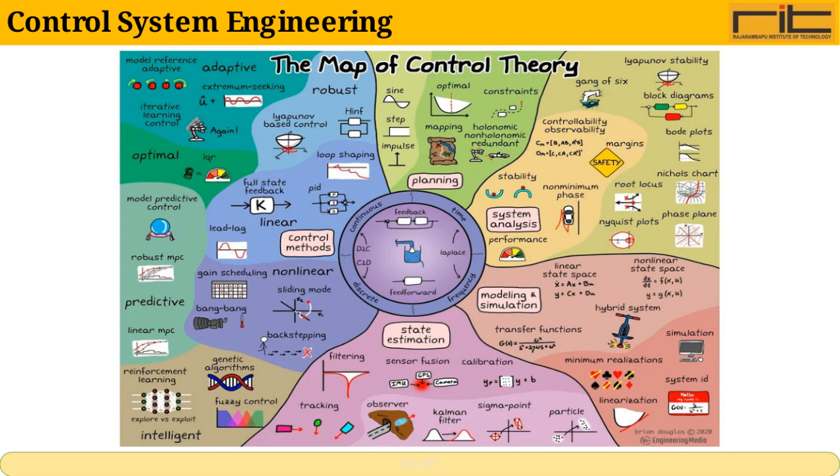After completing this session, students will be able to represent physical systems through mathematical models. This is a crucial skill as it allows us to move from real-world scenarios to a form we can analyze and work with mathematically. They will also learn to calculate time domain specifications for second-order systems. Understanding these specifications is essential because it helps us predict how a system responds over time, which is key in control engineering.

Additionally, students will develop the ability to analyze different systems using both time domain and frequency domain tools and techniques. This dual approach provides a comprehensive understanding of system behavior from different perspectives. We'll also cover the comparison of various controllers and compensators used in control systems, enabling students to choose the most suitable methods to achieve desired performance. Finally, students will apply state space techniques to analyze and understand MIMO, or multiple input multiple output, systems. This advanced approach is vital for managing complex systems with multiple variables. Overall, these outcomes equip students with a solid foundation in feedback control systems.

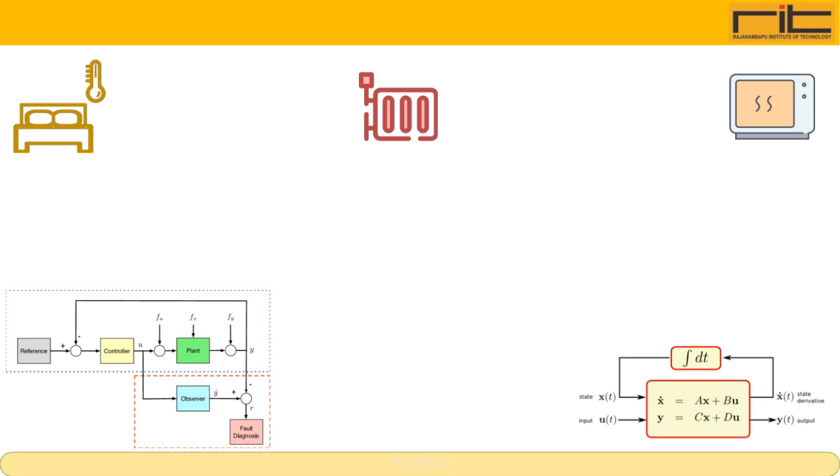Now, let's focus on Unit 2, which covers control system representation. This section is fundamental because it lays the groundwork for understanding how control systems are modeled and analyzed. We'll explore different ways to represent control systems, including mathematical models and graphical tools. This will help us to better predict how a system behaves under various conditions and design effective controllers. Understanding these representations is crucial for working with more complex systems later on.

By the end of this chapter, you will be able to clearly define and interpret what a transfer function means in the context of a linear time invariant system. You'll also learn how to identify the poles and zeros of a system, which are crucial for understanding its behavior. We will explore how to develop mathematical models for different types of systems, including electrical, mechanical, thermal, and hydraulic ones, using standard physical laws. Additionally, you'll gain the skills to construct and simplify block diagram representations of control systems, utilizing block diagram algebra for easier analysis.

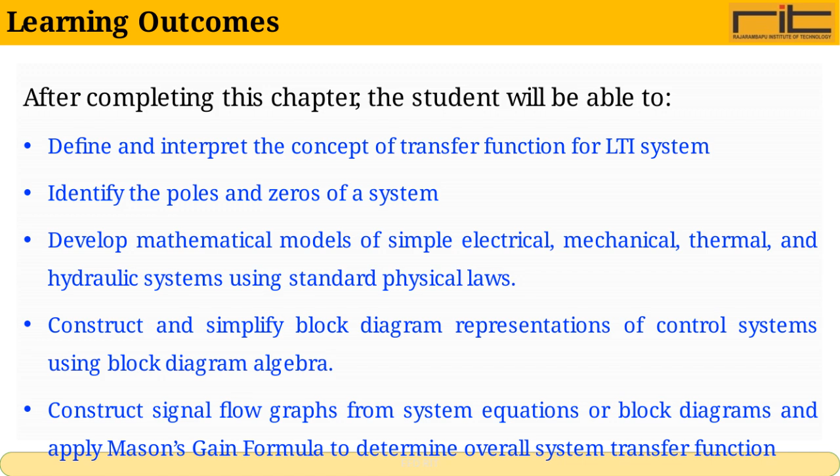We'll also cover how to create signal flow graphs from system equations or block diagrams, and apply Mason's gain formula to find the overall transfer function. Finally, you'll analyze how the locations of poles and zeros influence system behavior, especially regarding stability and transient response, in a qualitative way. These outcomes will give you a solid foundation to approach control system analysis confidently.

Here, we're focusing on some fundamental concepts that form the backbone of system analysis. First, we'll look at the transfer function, which is a crucial tool for describing the input-output relationship of a system in mathematical terms. Alongside this, we'll explore poles and zeros, which help us understand system behavior, stability, and response characteristics. Next, we'll delve into the mathematical representation of various simple systems, whether mechanical, electrical, thermal, or hydraulic. This will give us the ability to model real-world systems in a unified framework.

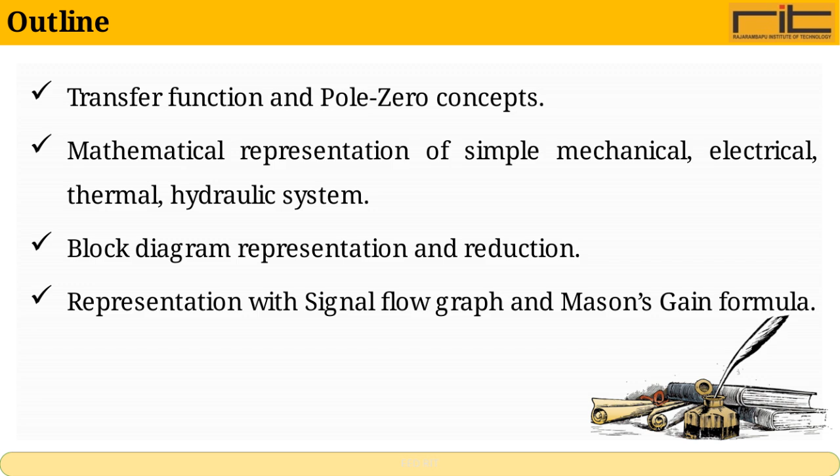Following that, we'll examine block diagram representation, which is essential for visually mapping out complex systems. We'll not only learn how to construct these diagrams but also how to simplify or reduce them, making analysis more manageable. Lastly, we'll cover signal flow graphs and Mason's gain formula, powerful techniques for analyzing system behavior and determining the overall transfer function in a more systematic and often simpler way. These concepts together will equip us with a solid foundation for deeper system analysis.

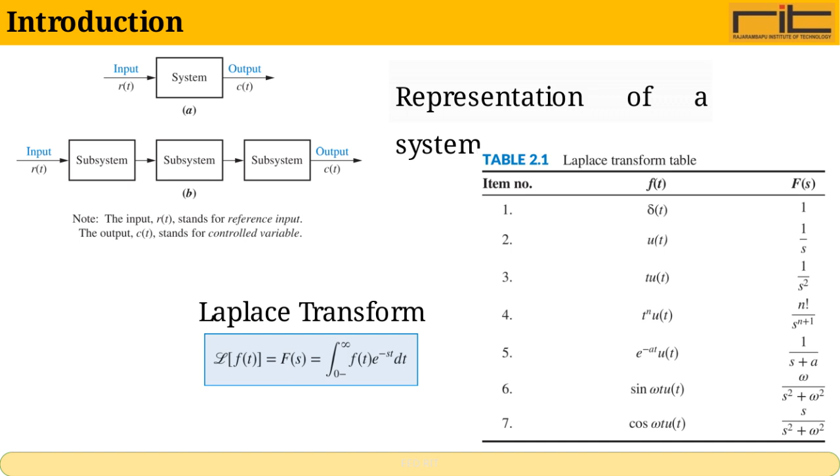Here we have the introduction to the Laplace transform, which is a powerful mathematical tool used to represent systems, especially in engineering and control theory. Essentially, the Laplace transform helps us convert complex differential equations, which describe system behavior in the time domain, into simpler algebraic equations in the frequency domain. This transformation makes analyzing and designing systems much more manageable. Understanding this concept is fundamental because it lays the foundation for how we model and control dynamic systems effectively.

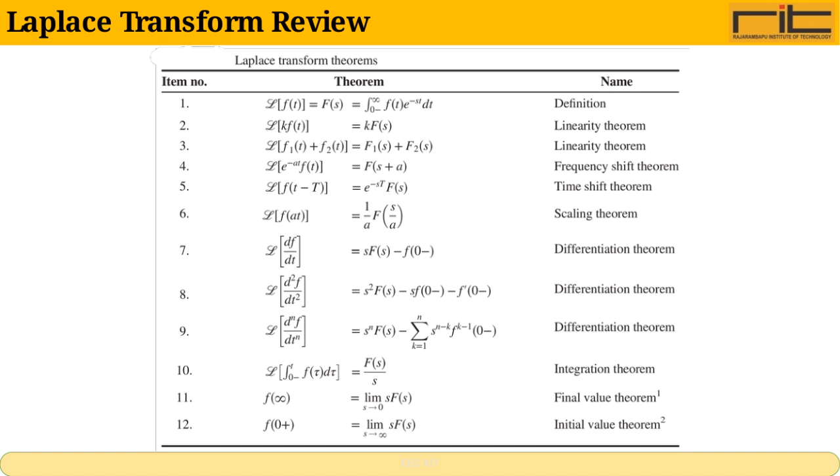Today, we're taking a closer look at the Laplace transform. This is a powerful mathematical tool that simplifies the process of analyzing complex systems, especially in engineering and physics. By transforming functions from the time domain into the S-domain, it makes solving differential equations much more manageable. Understanding the Laplace transform is essential because it allows us to work with algebraic equations instead of differential ones, making it easier to design and analyze systems. Throughout this review, we'll cover its definition, key properties, and some important applications. This foundation will really help when we move on to more advanced topics later on.

Here, we're focusing on the concept of the transfer function. Essentially, the transfer function is a mathematical representation that defines the relationship between the input and output of a system. It provides a way to analyze how signals are transformed as they pass through the system, often expressed in terms of frequency response. Understanding this function is crucial because it allows us to predict system behavior, design effective filters, and ensure stability in control systems. As we move forward, keep in mind that the transfer function forms the foundation for many advanced topics in system analysis and design.

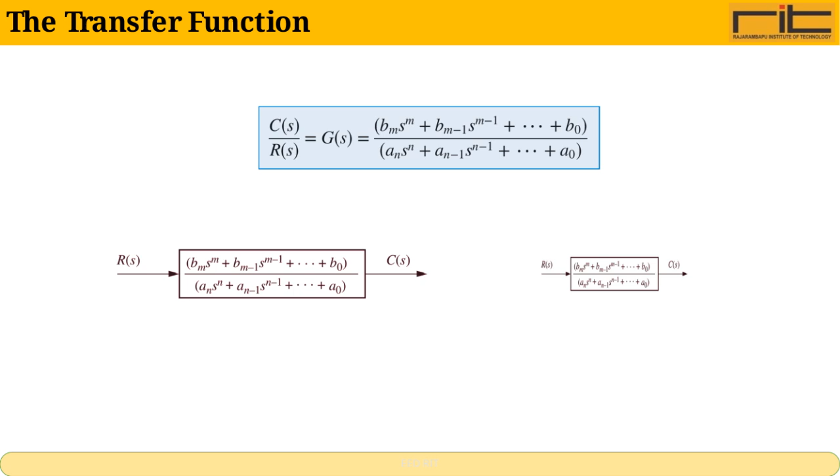Here, we're focusing on understanding how to find the transfer function. The transfer function is a fundamental concept in control systems and signal processing, as it describes the relationship between the input and the output of a system in the Laplace domain. Essentially, it helps us understand how the system responds to different inputs. In this example, we'll work through the process of calculating the transfer function step by step, breaking down the components involved. This will give us a clear picture of how to represent the system mathematically and analyze its behavior. The transfer function is typically expressed as a ratio of output to input, making it a powerful tool for designing and assessing system performance.

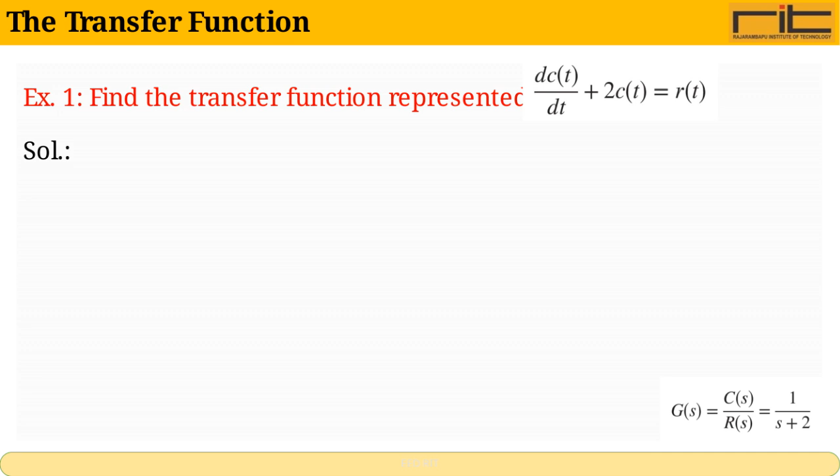Now, we will build on the previous example where we found a certain result, and use it to determine the system's response, C of t, to a specific input, particularly the unit step function, R of t equals U of t. It's important to note that we are assuming zero initial conditions here, which simplifies our calculations. This process essentially involves applying the transfer function to the input to find the output. By doing this, we can see how the system behaves over time when subjected to a sudden change like the unit step. Understanding this response is crucial for analyzing system stability and performance in practical applications.

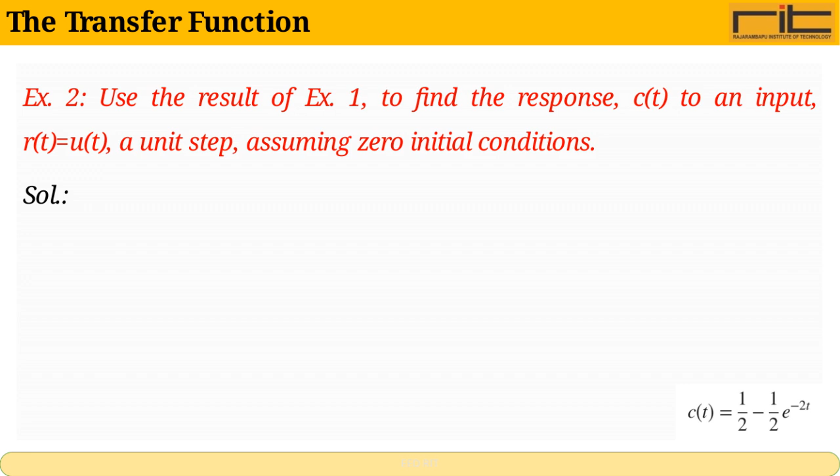Let's take a closer look at the pole zero concept, which is fundamental in understanding the behavior of many systems, especially in signal processing and control theory. The pole zero plot is a graphical representation that shows the locations of poles and zeros of a system on the complex plane. Poles are points where the system's transfer function goes to infinity, and they heavily influence system stability and response. Zeros, on the other hand, are points where the transfer function becomes zero, and they affect the frequency characteristics of the system.

By analyzing the distribution of poles and zeros, we can predict how the system will behave in terms of stability, resonance, and filtering properties. This plot serves as a valuable tool in designing and analyzing systems to achieve desired performance.

Here we focus on the pole zero concept, which is fundamental in understanding system responses. The key idea is that the form of a system's homogeneous response is directly determined by the locations of its poles on the pole zero plot.

Poles are specific points in the complex plane that represent the system's natural frequencies and damping characteristics. When we look at this plot, each pole influences how the system behaves over time, shaping the overall response.

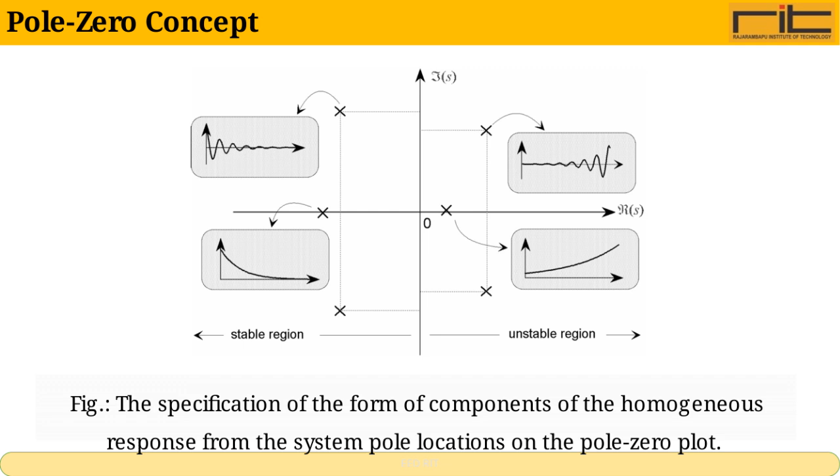This concept is crucial for analyzing stability and dynamic performance, as it links the system's mathematical model to its physical behavior. By studying the pole zero configuration, we can predict how the system will react to different inputs and design it for desired characteristics.

Let's take a closer look at electrical network transfer functions. The equivalent circuits we're dealing with are made up of three key passive linear components: resistors, capacitors, and inductors. Each of these components has distinct electrical properties and relationships between voltage and current.

For resistors, the voltage across the component is directly proportional to the current flowing through it, following Ohm's law. Capacitors relate voltage to the charge stored, and their current depends on the rate of change of voltage. Inductors link voltage to the rate of change of current through them.

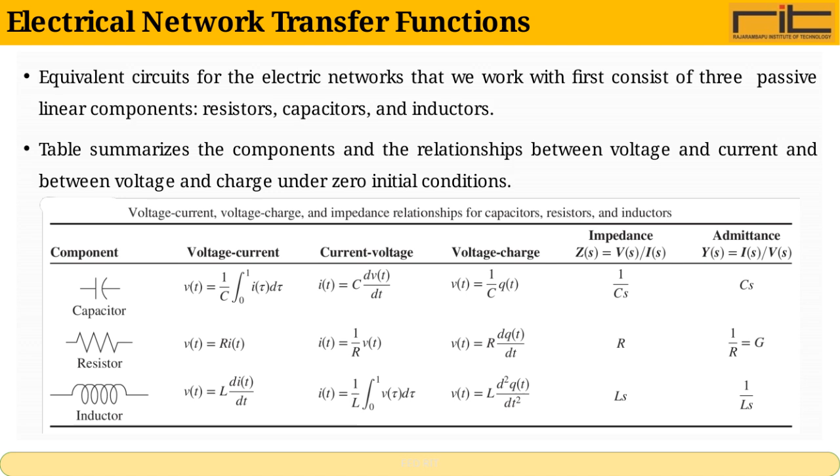Under zero initial conditions, these relationships allow us to model the behavior of complex circuits by analyzing these basic building blocks. This table neatly summarizes these relationships, making it easier to understand how voltage, current, and charge interact within each component. Understanding these fundamentals is crucial for analyzing and designing efficient electrical networks.

Here we're focusing on an example that helps us understand how to derive the transfer function of an electrical network. Specifically, we want to find the transfer function that relates the capacitor voltage, denoted as Vc(s), to the input voltage, V(s).

This means we're looking at how the voltage across the capacitor changes in response to the overall input voltage applied to the circuit. Understanding this relationship is crucial because it tells us a lot about the circuit's behavior in the frequency domain, which is essential for analyzing and designing electrical systems effectively.

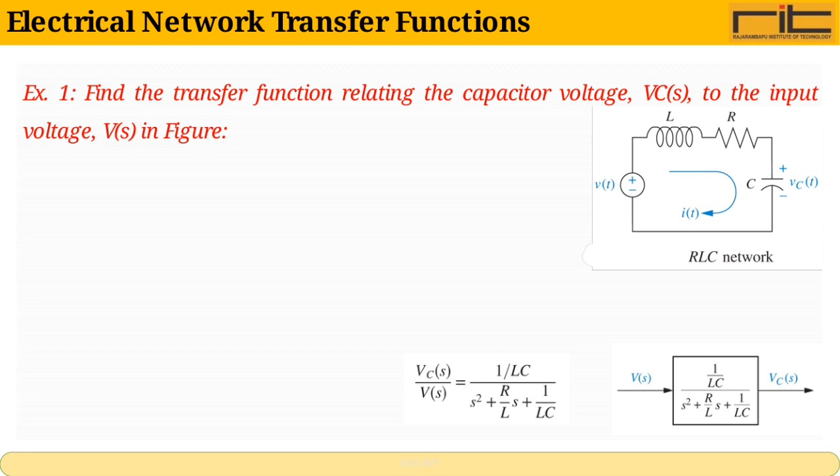As we proceed, pay close attention to how the voltages and impedances interact, as this will guide us in setting up the right equations to find the transfer function.

On this slide, we are focusing on electrical network transfer functions, which are essential for analyzing how different components affect signals within a circuit. The key elements here are the resistor, the inductor, and the capacitor. Each of these components has its own transfer function, which describes how they respond to electrical inputs, especially as frequencies change.

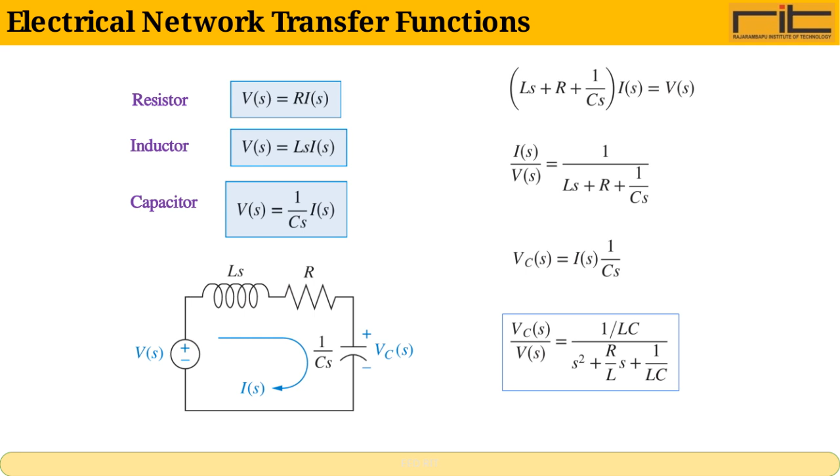For example, resistors have a straightforward transfer function as they oppose current consistently, regardless of frequency. Inductors, on the other hand, oppose changes in current more at higher frequencies, and capacitors do the opposite, allowing more current at higher frequencies. Understanding these transfer functions is crucial for designing and analyzing circuits for filtering, signal processing, and many other applications.

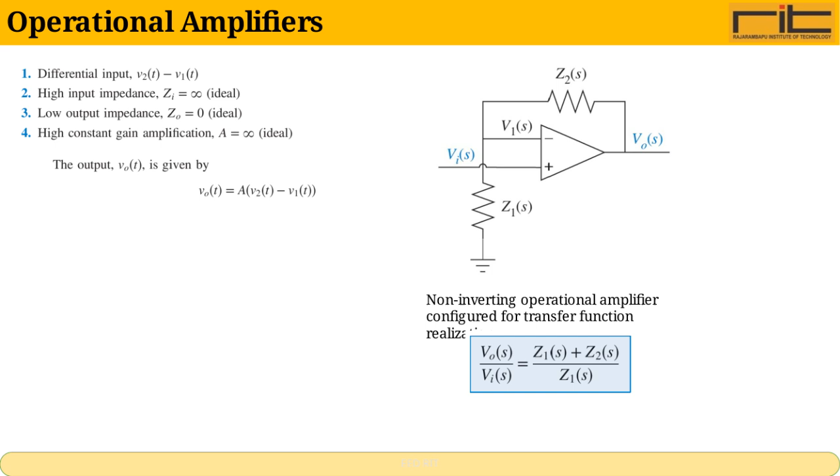This setup is widely used because it offers high input impedance and low output impedance, which is excellent for signal amplification without loading the source. Essentially, it's a reliable and efficient way to achieve precise signal amplification, making it fundamental in many electronic circuits.

Here we have an important topic in operational amplifier circuits, the inverting and non-inverting configurations. These two fundamental setups define how the input signal is processed and amplified by the op-amp. In the inverting configuration, the input signal is applied to the inverting input terminal, which results in the output being inverted in phase, meaning it flips upside down relative to the input. This allows for precise gain control using feedback resistors.

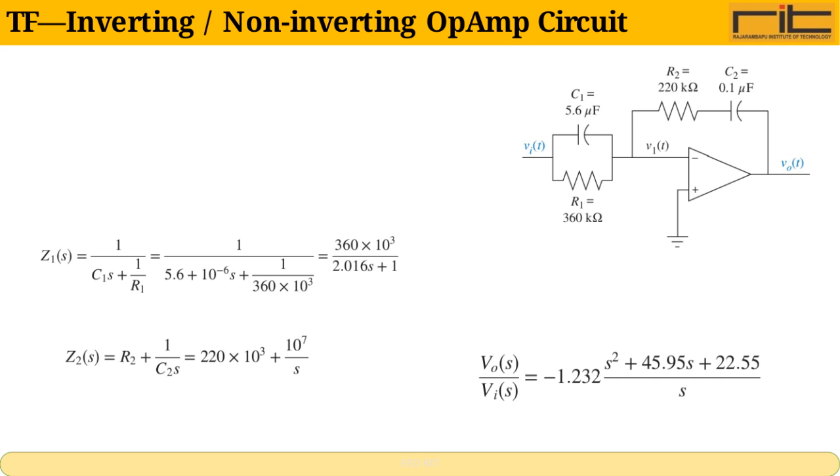Meanwhile, the non-inverting configuration applies the input signal to the non-inverting terminal, so the output remains in phase with the input. Both configurations are widely used in different applications depending on whether we want the output to be a mirror image or to maintain the original signal direction. Understanding these configurations is essential for designing circuits with the desired amplification characteristics and signal behavior.

In mechanical systems, much like electrical networks, we work with three fundamental passive components. Two of these, the spring and the mass, are responsible for storing energy within the system. Think of the spring as storing potential energy when it's compressed or stretched, and the mass as storing kinetic energy through its motion. The third component, the viscous damper, acts quite differently.

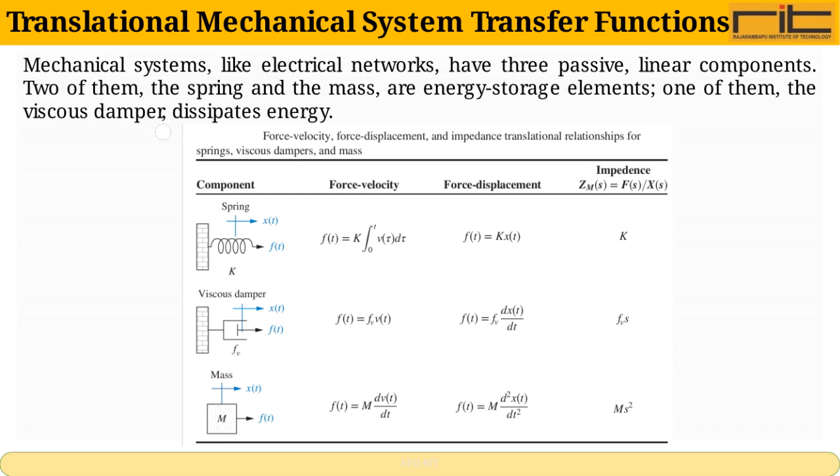It dissipates energy, usually in the form of heat, which helps to control and reduce oscillations or vibrations within the system. Understanding how these elements interact is crucial when we analyze translational mechanical system transfer functions, as these relationships govern the system's overall behavior and response to external inputs.

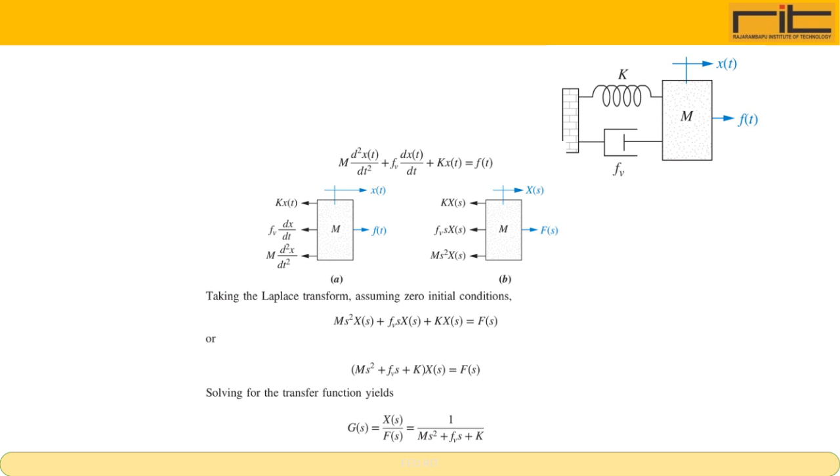When dealing with rotational mechanical systems, the approach is very similar to that used for translational mechanical systems. The main difference lies in the quantities involved. Instead of force, we use torque, and instead of translational displacement, we focus on angular displacement.

Essentially, the transfer functions for these systems express how the rotational input, measured as torque, relates to the output, which is the angular position or velocity. Understanding this substitution is key to analyzing the behavior of rotational mechanical systems using the same principles we apply to linear systems.

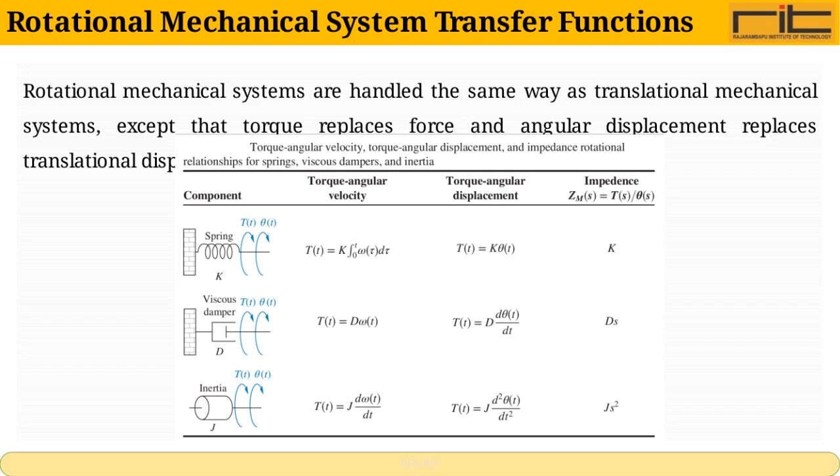This allows us to model and predict system responses effectively in a consistent and unified way.

On this slide, we focus on determining the transfer function for a rotational mechanical system. Specifically, we want to find the ratio of the angular displacement, θ2 of s, to the input torque T of s. This transfer function is crucial because it helps us understand how the system responds dynamically to various inputs.

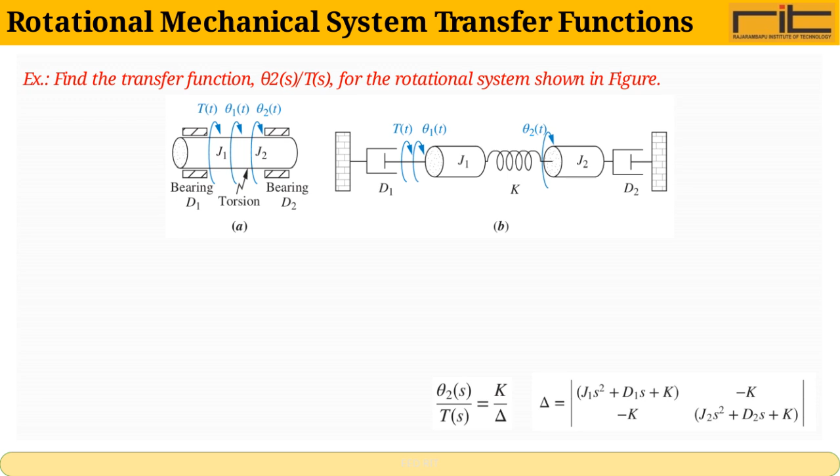By analyzing this, we can predict the system's behavior in the frequency domain, which is essential for design and control purposes. The example provided guides us through the process, showing the relationships between torque and angular displacement in the modeling of rotational systems. This forms the foundation for deeper analysis in mechanical vibrations and control engineering.

Today, we're focusing on electromechanical system transfer functions. These functions are essential because they help us understand how electrical inputs convert into mechanical outputs in various systems. By analyzing these relationships, we can predict the system's behavior, design better controls, and improve performance.

Transfer functions essentially provide a mathematical model that links input signals to output responses, making them indispensable tools in the design and analysis of electromechanical devices. Understanding these functions allows us to work with motors, sensors, and actuators more effectively, ensuring that each part of the system responds appropriately under different operating conditions.

Let's explore the concept of electric circuit analogs. Essentially, an electric circuit analog is an electrical circuit that represents a system from a different field, often mechanical or thermal systems. This allows us to use electrical principles to analyze and understand the behavior of these other systems.

For example, when developing a parallel analog, we start with a mechanical system, then identify the electrical representation we want to achieve. Following this, we design the parallel analog circuit, carefully selecting parameters that correspond to the mechanical system's characteristics. This approach is invaluable because it gives us a practical way to model and study complex systems using well-established electrical circuit theory.

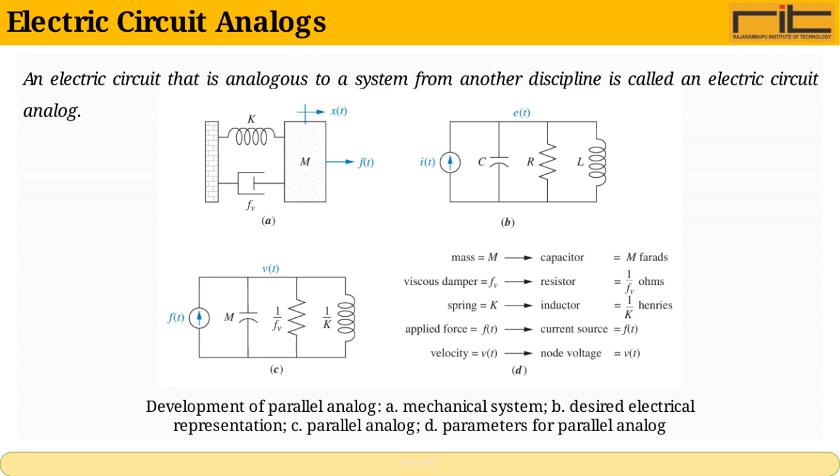This approach is particularly useful because it makes solving problems simpler by leveraging electrical circuit analysis techniques. The key takeaway is that by drawing these analogies, we can understand and predict the behavior of different physical systems through the lens of electricity.

A block diagram is essentially a visual way to represent the functions performed by each component in a system and to show how signals flow through it. One of the main advantages is that it's quite straightforward to construct these diagrams, even for complex systems. This simplicity helps us break down and understand how each part contributes to the system's overall operation.

Another key benefit is that we can study both the performance of individual components and the system as a whole by using transfer functions, which are clearly laid out in the diagram. This makes analyzing the system much more manageable.

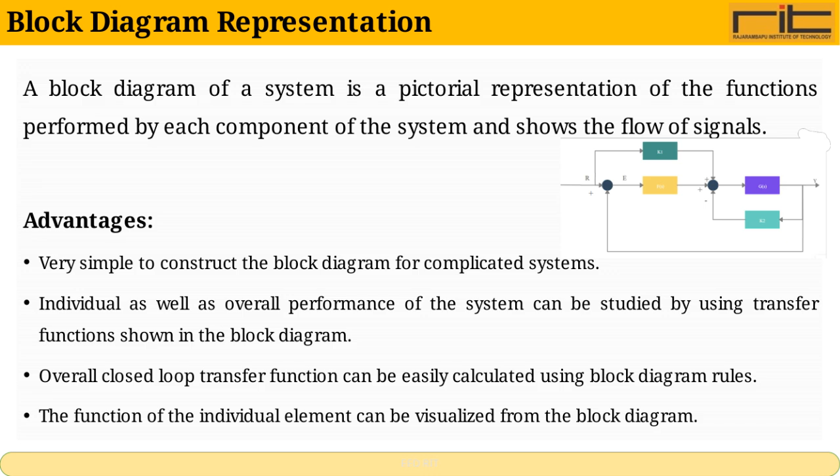Additionally, calculating the overall closed-loop transfer function becomes easier with block diagram rules, giving us a clear view of the system's behavior under feedback conditions. Lastly, the function of each element is easier to visualize, so we can quickly grasp how the entire system operates at a glance.

Here, we are focusing on the basic elements of a block diagram. One of the key components is the block itself, which represents a system or a process. Another important element is the summing point, which combines multiple inputs, often by adding or subtracting them.

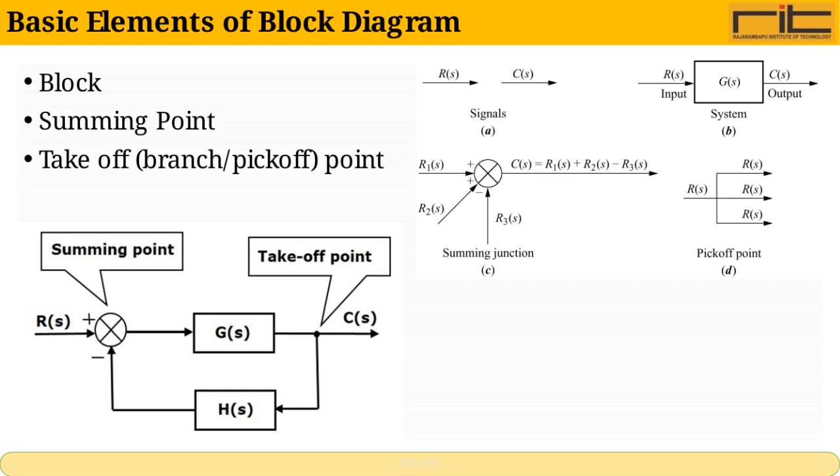Lastly, the takeoff, or pick-off point, is where we extract a signal or value from the system for feedback or further processing. Understanding these core elements helps us interpret and design block diagrams effectively.

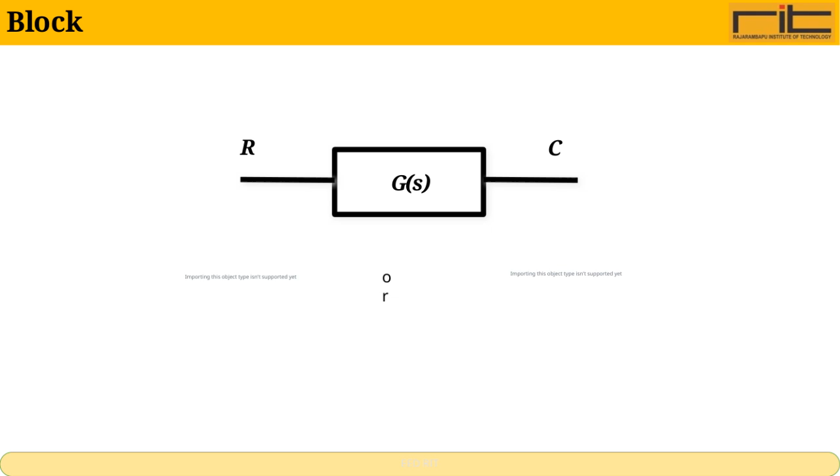This block diagram simplifies the system into manageable parts for analysis and design. Here, we have the summing point, which is a crucial element in control systems. It's represented by a circle with a cross inside it. This symbol is quite intuitive because it shows multiple inputs coming together at a single point.

The summing point takes two or more inputs and produces a single output, which is the algebraic sum of those inputs. What makes it particularly interesting is that it doesn't just add the inputs blindly. Instead, it considers the polarity of each input. This means it can perform summation, subtraction, or even a mix of both, depending on whether the inputs are positive or negative. This flexibility allows us to combine signals effectively, which is essential for accurate system control and analysis.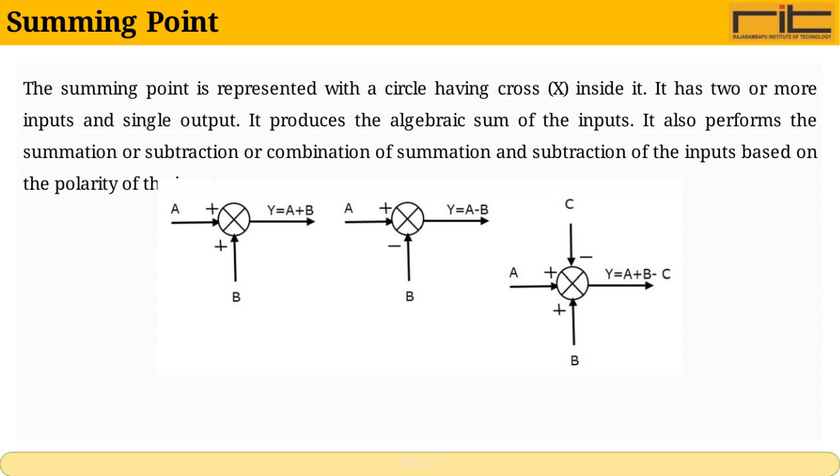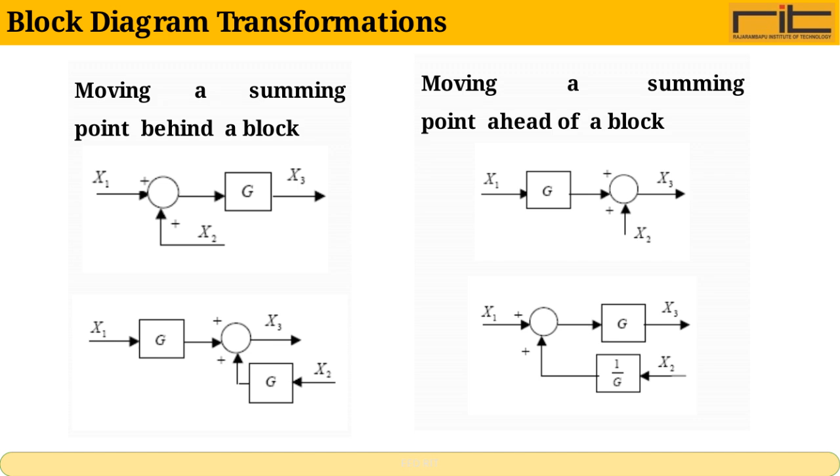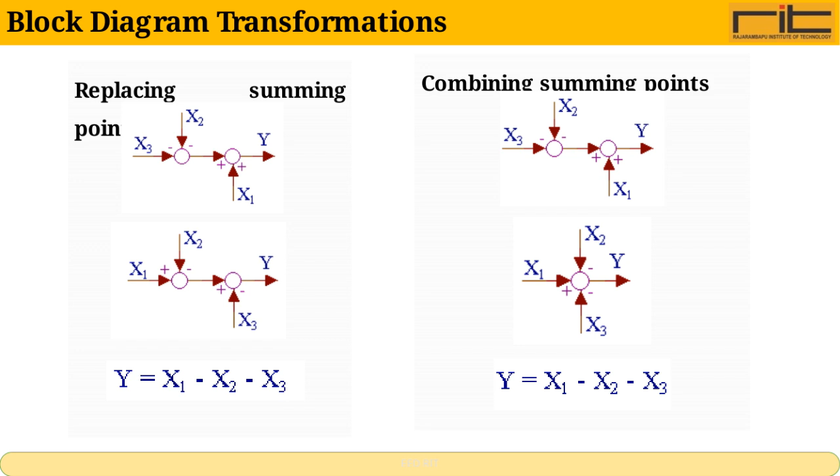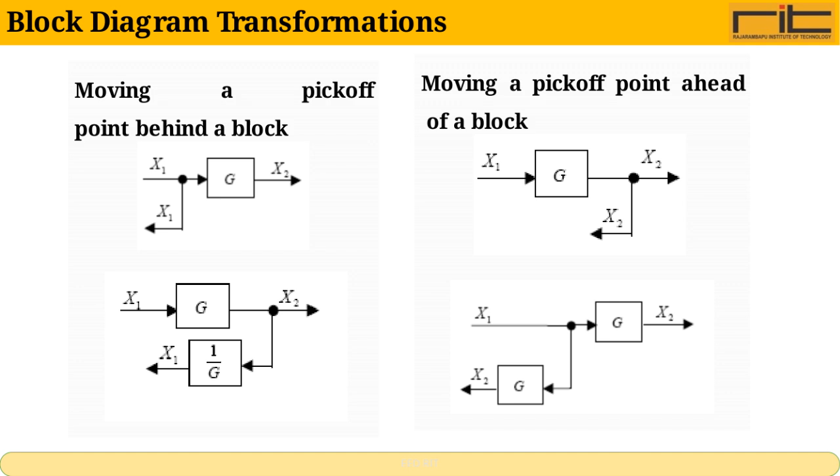Conversely, moving a pickoff point behind a block means shifting the measurement point to after the signal has been processed by the block. This also affects how the system behaves and can be useful for different analysis techniques. Understanding these transformations is crucial because they allow us to manipulate block diagrams without changing the overall system behavior. This makes troubleshooting and system design much more flexible and efficient.

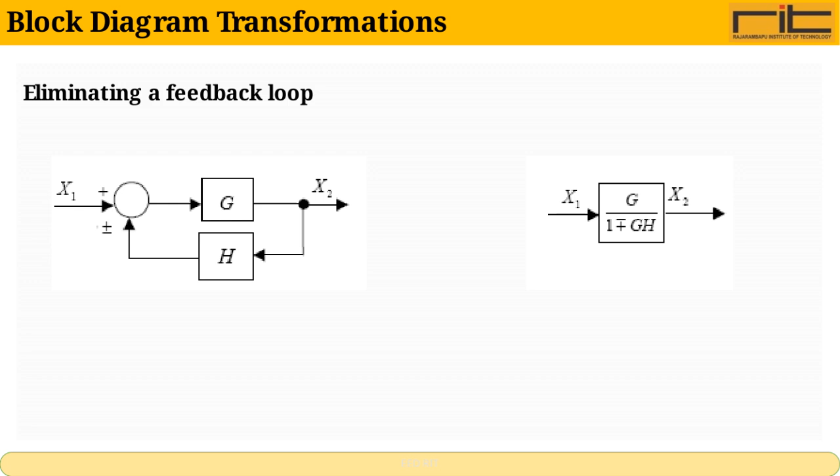Now let's talk about block diagram transformations, focusing first on the concept of eliminating a feedback loop. Feedback loops occur when the output of a system is fed back into the input, which can complicate analysis. By transforming the block diagram to remove these loops, we simplify the system, making it easier to understand and work with. This process often involves rearranging the blocks and combining gains to represent the system without the feedback loop, which streamlines further analysis or design steps. Understanding how to eliminate feedback loops is crucial for effectively managing complex control systems.

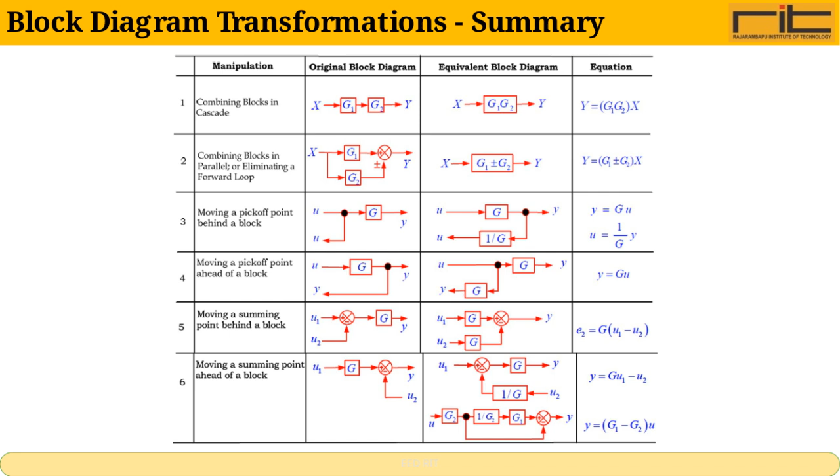By applying these transformations carefully, we can reduce any intricate block diagram into a basic form, which helps in determining overall system transfer functions efficiently. Mastering these transformations is crucial because it forms the foundation for more advanced control system design and stability analysis. Always remember, the integrity of the system's behavior must remain intact while you apply these simplifications.

Here, we have a block diagram reduction example. The process involves simplifying a complex network of blocks step by step to make analysis easier. By combining series and parallel blocks, and applying reduction rules, we can systematically reduce the entire diagram into a single equivalent block. This simplification helps us understand the overall system behavior without getting lost in intricate details. It's important to follow each step carefully to ensure the reduced model accurately represents the original system.

On this slide, we have a block diagram reduction example. Although some objects are not visible here, the main focus is on simplifying complex block diagrams step by step. The purpose of block diagram reduction is to combine various elements into simpler blocks, making it easier to analyze system behavior. By methodically reducing the blocks, we can find overall system transfer functions or other key parameters more efficiently. It's a fundamental technique in control systems engineering to manage and understand complex system interactions.

Here, we have a block diagram reduction example. Although the specific objects are not visible in this slide, the key concept is to simplify complex block diagrams step by step. This process helps us analyze system behavior more efficiently by breaking down complicated connections into more manageable parts. By reducing the diagram, we can identify the overall transfer function or equivalent system representation much more easily. This technique is essential for control system analysis and design.

Here we have an example that illustrates the key principles we've been discussing. This example helps to contextualize the concepts and shows how they can be applied in a real-world scenario. By examining this case closely, we can better understand the practical implications and the potential outcomes when these strategies are implemented. Let's take a closer look and break down the main elements to see how they work together effectively.

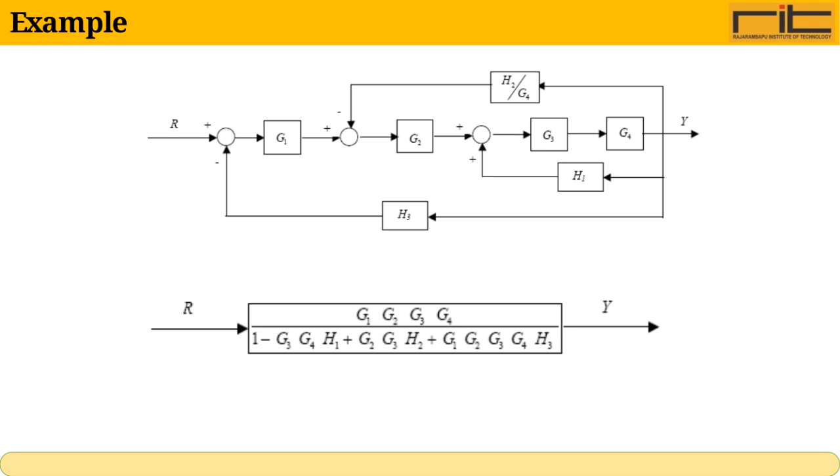On this slide, we have a simple example to illustrate the concept we've been discussing. The key here is to focus on how the example applies the principles in a practical way, making it easier to understand the real-world impact. By examining this example closely, we can see how the theory translates into action, which helps solidify our understanding. Let's take a closer look and consider how the elements interact within this scenario.

Here we have a simple example to illustrate the concept we've been discussing. Although the slide is quite minimal, it serves to highlight the core idea in a straightforward way. Let's focus on understanding the key elements and how they apply in practical terms, ensuring we grasp the fundamental principles before moving on. This example will help to solidify your understanding and prepare you for more complex applications later.

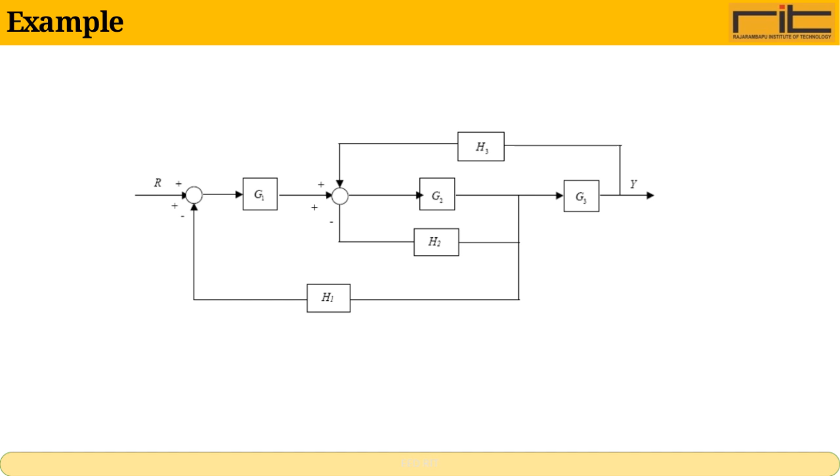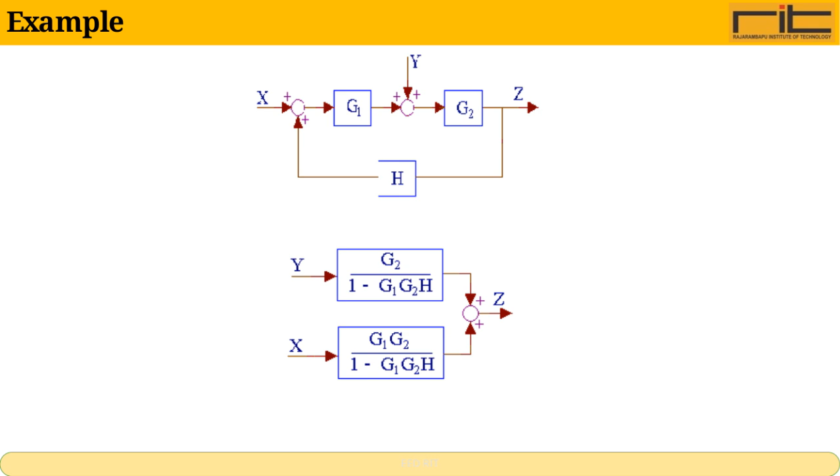Here, we have an example to illustrate the points we've been discussing. Although the slide is simple, it serves as a practical demonstration of the concepts in action. Pay attention to how these elements come together, as this example encapsulates the key ideas we've covered so far.

A signal flow graph, or SFG, is a visual way to represent the relationships between the variables in a system. Instead of having to simplify complex equations, we can use Mason's gain formula directly to find the transfer function, which is a big advantage. SFGs are particularly useful because they provide a clear graphical representation of systems made up of simultaneous linear equations.

In an SFG, we have nodes and branches. A node represents a variable or a signal point in the system. There are three types of nodes: input nodes, output nodes, and mixed nodes, each serving a different role. Branches are the lines connecting these nodes, and they carry important information like the gain, which is essentially the weight or influence of that connection, and direction, which shows the flow of the signal from one node to another. Understanding these components is key to applying Mason's gain formula effectively and analyzing complex systems with ease.

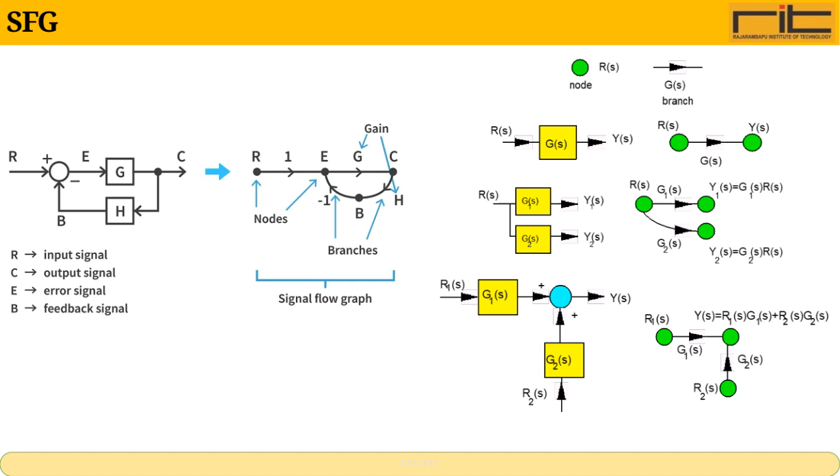First, an input node is defined as a node that only has outgoing branches. Think of it as the starting point of a signal. Conversely, the output node is one that only has incoming branches, essentially representing the end point. If a node doesn't meet these strict criteria, we can introduce an extra branch with a gain of 1 to satisfy the condition.

Next, we have the term a path. This refers to moving through connected branches following the arrow's direction without visiting any node more than once. A forward path is a specific type of path that links the input node to the output node directly. Then, we come to loops, which are paths that start and end at the same node. If two loops share no nodes in common, they're called non-touching loops, an important concept when calculating overall system behavior. Finally, path gain is the product of the gains along each branch in the path. Understanding these terms is crucial for analyzing signal flow in systems effectively.

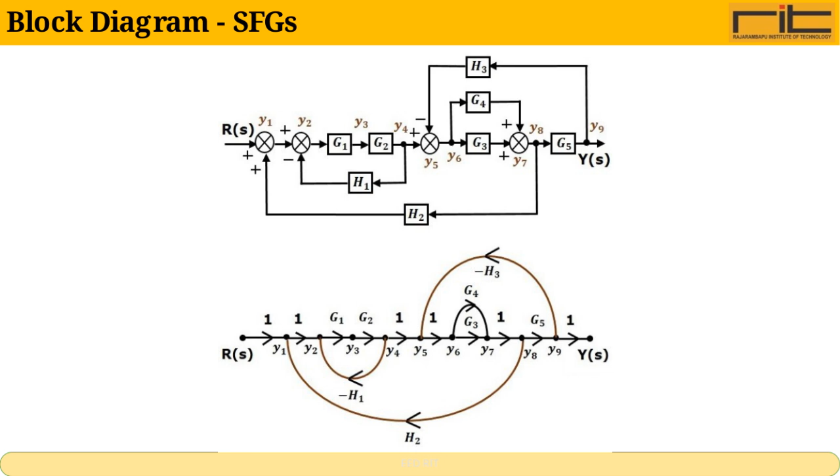Here we have a block diagram illustrating signal flow graphs, or SFGs. Signal flow graphs are a powerful visual tool used to represent and analyze the relationships between different variables within a system. They help us understand how signals travel from inputs to outputs through various interconnected components. By using blocks and directed branches, we can map out the entire system's signal flow clearly and efficiently. This approach not only simplifies complex system analysis but also aids in identifying key control points and potential feedback loops. Understanding this diagram is crucial for grasping how the system operates and for designing effective control strategies.

On this slide, we focus on SFG, which is an important concept to understand in our discussion. Although the slide appears simple, the key idea here is to grasp the fundamental aspects of SFG. We will explore how it fits into the broader context and why it is essential for our overall topic. Let's keep this concept in mind as it will be a foundation for what comes next.

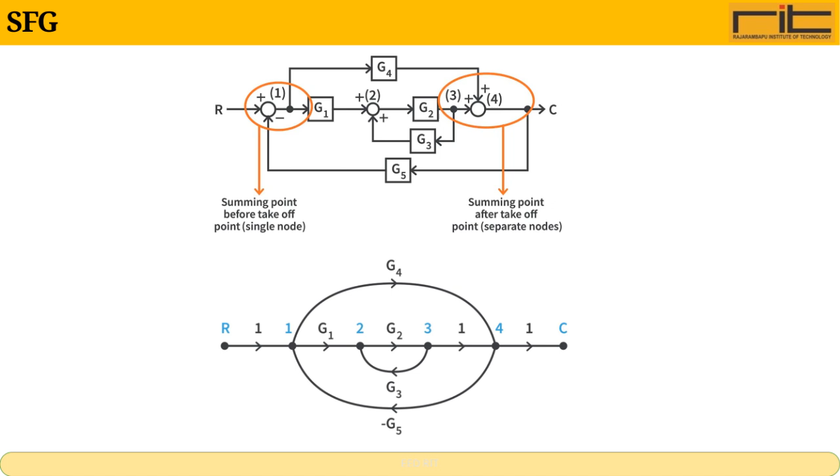Here we have Mason's gain formula, which is a powerful method for determining the overall transfer function of a complex signal flow graph. The transfer function, denoted as TF, is given by the ratio of the output to input, and Mason's formula provides a clear way to calculate this using loop gains and forward paths. First, delta is a key term here, representing 1 minus the sum of all individual loop gains.

But it doesn't stop there. If there are multiple loops that don't touch each other, we add the sum of their gain products. Then we subtract the sum of products of all combinations of 3 non-touching loops, and so on, alternating signs throughout. This alternating series captures the complex interactions between loops within the system.

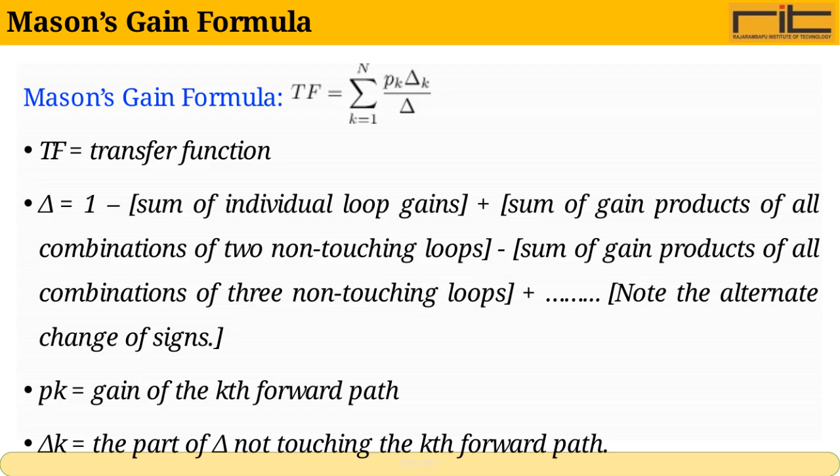Next, Pk represents the gain of the kth forward path, basically the direct route from input to output without cycling back. Lastly, delta-k is quite important. It represents the portion of delta that excludes any loops touching the kth forward path. This allows us to isolate the effective loops that are independent of that specific path. By combining all of these elements, Pk, delta-k, and delta, we can accurately compute the overall transfer function, even in systems with multiple loops and forward paths. This formula is essential in control systems and signal flow analysis for simplifying and solving complex networks efficiently.

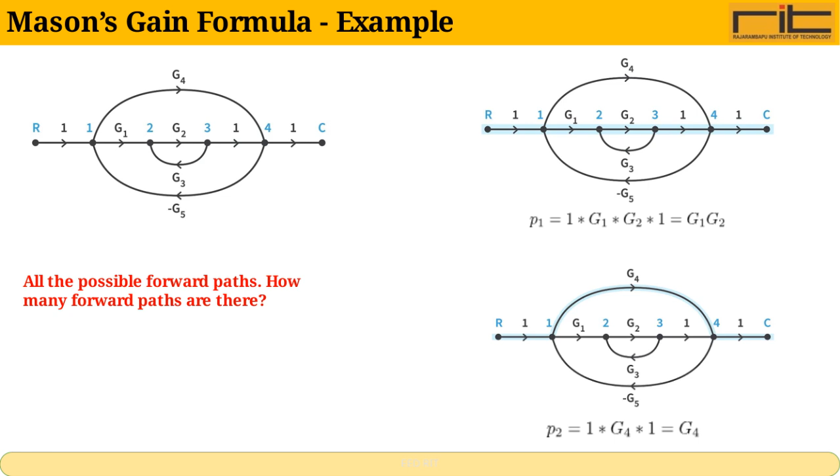Here, we are focusing on Mason's gain formula, specifically looking at an example to understand it better. One of the key steps in applying this formula is to identify all the possible forward paths within the system. So, the big question we're asking here is, how many forward paths can we find? Recognizing each forward path is crucial because it helps us calculate the overall transfer function accurately. Let's take a moment to carefully examine the system to pinpoint every forward path from the input to the output.

Here, we're looking at an example of Mason's gain formula. The key concept to understand is how we identify all the individual loops within a signal flow graph. These loops are essential because they help us calculate the overall transfer function of the system.

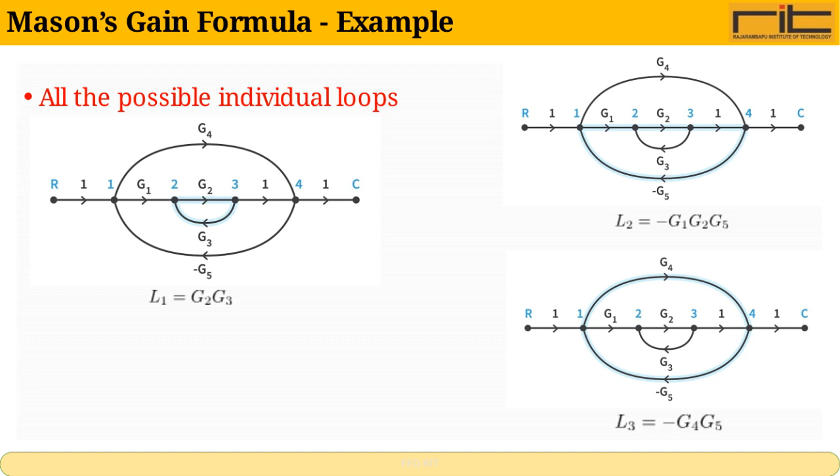By carefully listing every possible loop, we can apply Mason's gain formula accurately to determine the system's gain. This step is crucial as missing any loop can lead to incorrect results. So the focus here is on thoroughly finding all the loops before proceeding with the formula.

Here we're looking at an example related to Mason's gain formula, specifically focusing on non-touching loops. Non-touching loops are pairs of loops that do not share any common nodes. In this case, we have only one such pair, which are loops L1 and L3. When these loops are non-touching, their gains can be multiplied together to contribute to the overall gain calculation.

For this pair, the product of their gains is given as negative G2 times G3 times G4 times G5. Understanding these pairs is crucial because it helps us systematically determine the determinant in Mason's formula, making the analysis of complex systems more manageable.

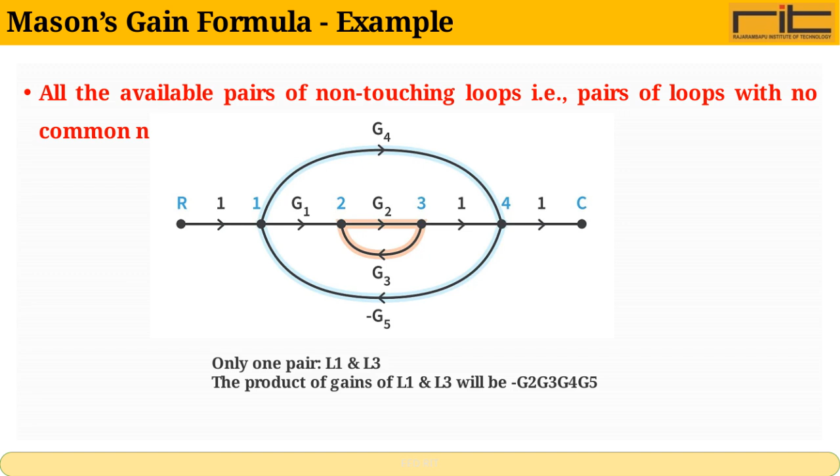Now let's take a closer look at Mason's gain formula with an example. To find Delta 1, the key step is to set the gains of all branches that touch the forward path P1 to 0 in the equation for delta. This effectively removes those paths from consideration, allowing us to focus specifically on the loops that do not intersect with P1. By doing this, we can accurately calculate the determinant corresponding to that forward path, which is essential in analyzing complex control systems.

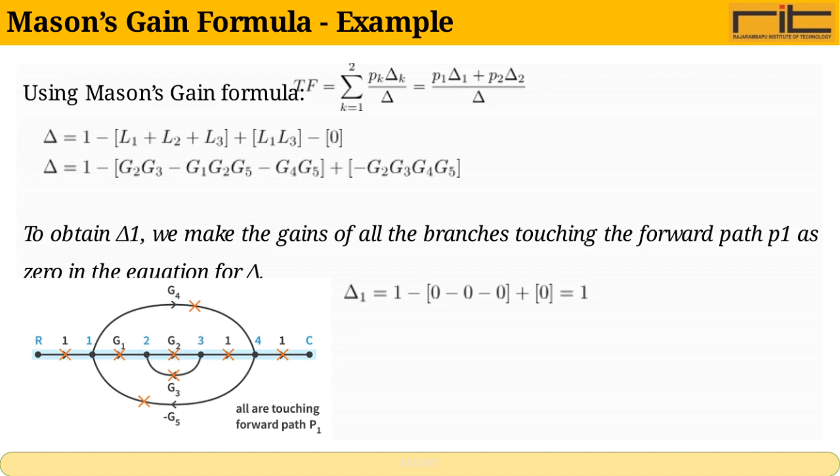This method ensures we account for all interactions within the system, making our overall analysis precise and reliable. Now, to find Delta 2 using Mason's gain formula, we need to look at the forward path P2. The key step here is to make the gains of all branches that touch this forward path equal to 0. In this case, the branches G1, G4, and G5 all touch the forward path P2, so we set their gains to 0 in the equation. On the other hand, gains G2 and G3 do not touch the forward path P2, so we keep them as they are. This approach helps us isolate the effect of the non-touching loops and accurately calculate Delta 2.

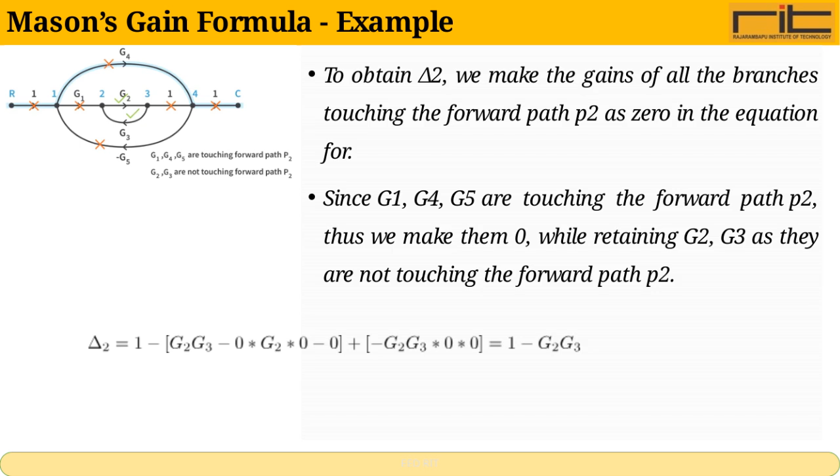Here we're looking at an example that demonstrates Mason's gain formula. This formula is a powerful tool we use to determine the overall gain of a complex system by analyzing its signal flow graph. Instead of going through numerous algebraic steps, Mason's gain formula simplifies the process by considering all the forward paths and loops in the system and their interactions. Understanding this example will help you clearly see how to apply the formula to find the transfer function, which represents the system's output response to an input.

This method is especially useful in control systems and signal processing where systems can have multiple feedback loops. As we walk through the example, pay close attention to how the paths and loops are identified and how the gains are calculated and combined.

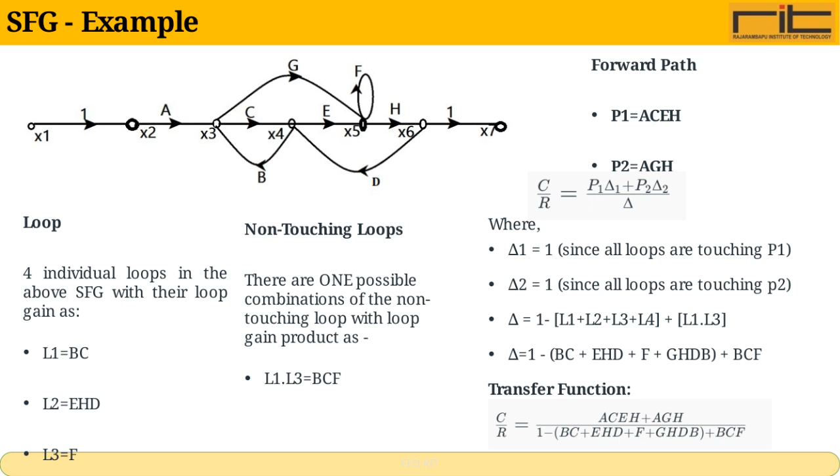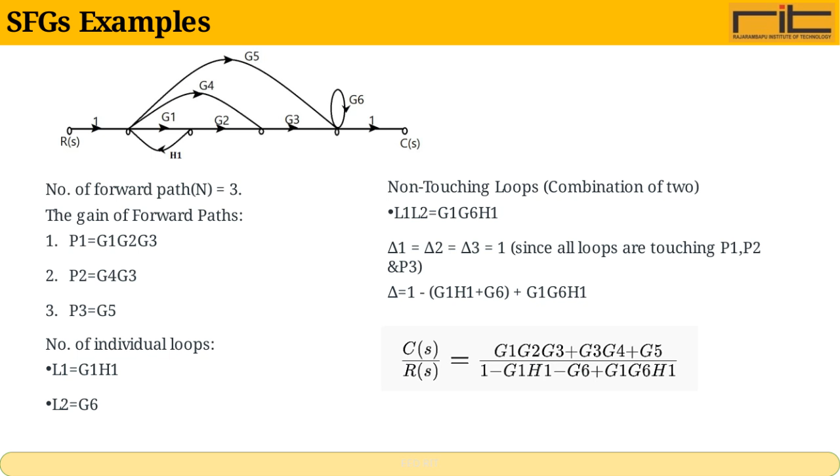Finally, there are three forward paths in the graph. Their gains are given as P1 equals G1 G2 G3, P2 equals G4 G3, and P3 equals G5. Understanding these relationships helps in applying Mason's gain formula to find the overall system gain efficiently.

On this slide, we are focusing on examples of SFGs, or signal flow graphs. Signal flow graphs are a powerful visual tool used to represent the relationships and dependencies between variables in a system. By exploring various examples, we can better understand how these graphs simplify complex mathematical equations and system behaviors into a clear, graphical format. This not only helps in analyzing the dynamics but also makes it easier to apply methods like Mason's gain formula to find system responses efficiently.

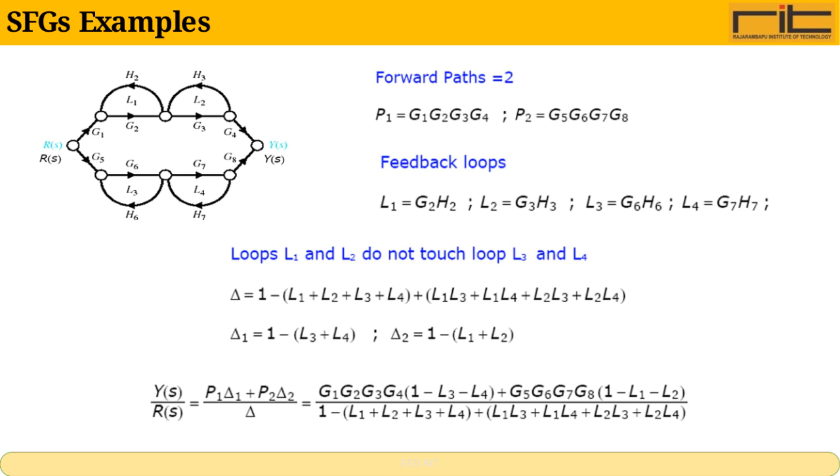As we go through the examples, pay attention to how nodes and directed branches illustrate the flow of signals and how feedback loops are represented. This foundational understanding is crucial for working with control systems and signal processing applications.

Now, let's look at some examples involving signal flow graphs. We start with forward path gains, which represent the gain from the input to the output along a particular path. Then, we consider individual loop gains, which are the gains around feedback loops within the system.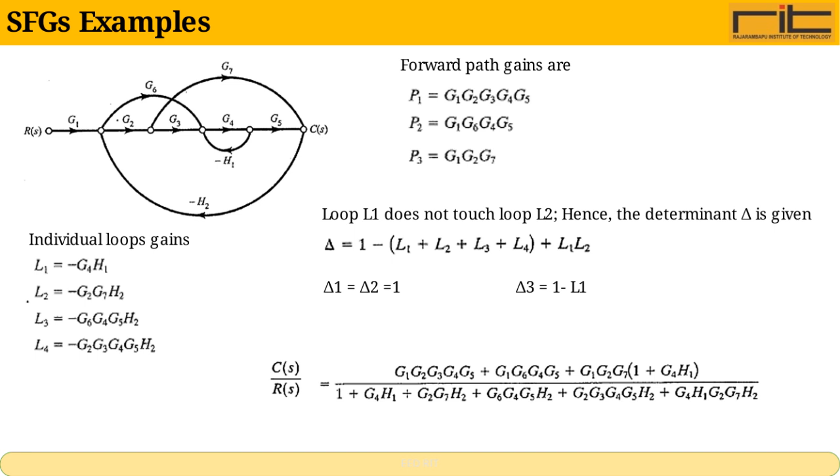On this slide, we focus on examples related to signal flow graphs, or SFGs. First, we have forward paths, which represent the routes through the system from input to output without any direction reversals. Understanding these paths is essential because they help us analyze how signals propagate through the system.

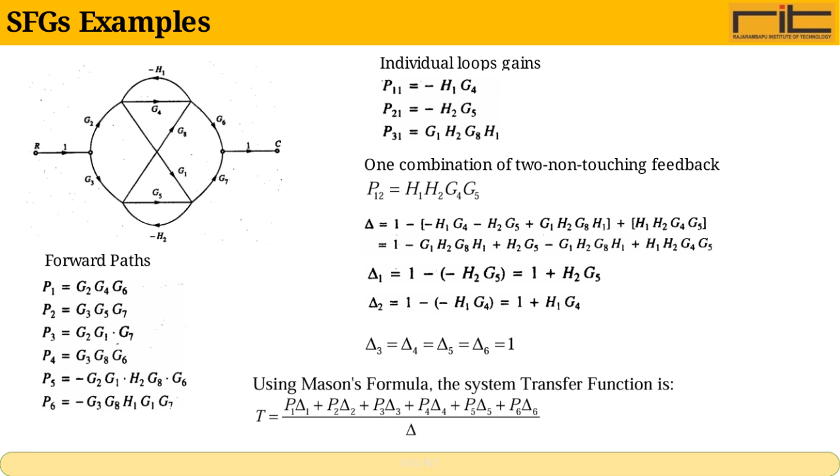Next, we look at individual loop gains, which quantify the feedback within each loop. Each loop gain gives us insight into how much influence a feedback loop has on the overall system behavior. Finally, we consider combinations of two non-touching feedback loops. These are loops that operate independently without sharing any nodes, and recognizing these combinations is crucial when applying Mason's gain formula to find the overall system transfer function. Keeping track of these elements helps us systematically study complex control systems with multiple feedback loops.